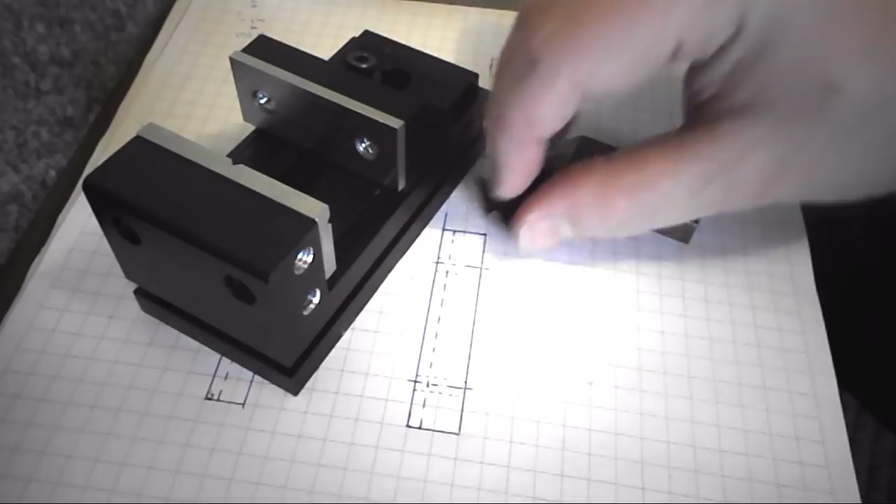I primarily use this vise on my Sherline mill. It's a Sherline vise, and it actually works really well. It's a screwless vise with an aluminum body, however it does hold pretty steady.

But clamping the vise to the table is the major issue I end up dealing with. Something I added recently was some holes to the side to put stops, and I'd also like to make some jaws. These jaws here are removable, held by 2 screws.

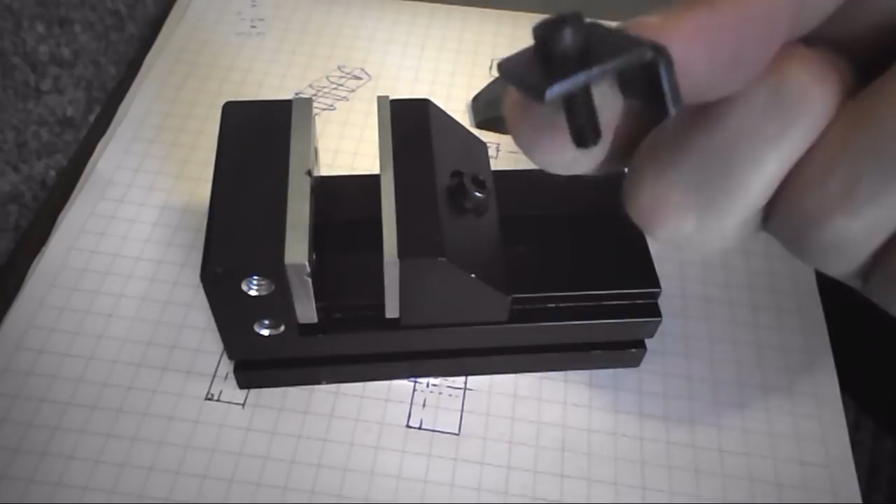Some jaws, maybe step jaws, some things like that. This is what you can buy from Sherline as a hold down, and it works, but I just want something a little more substantial.

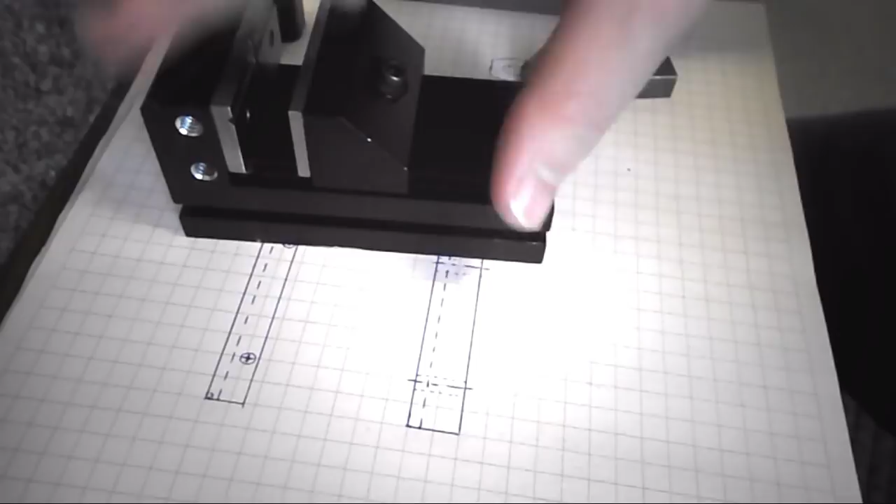So I came up with this, which is a piece that would span the entire length of the table, 2.5 inches, and have 2 locations to bolt into the 2 T-slots, and they would be rails that would catch on this side rail.

And I came across a whole bunch of this A2 stock. It's oversized, 3/8 by half, so I'm going to use this to make the side rails.

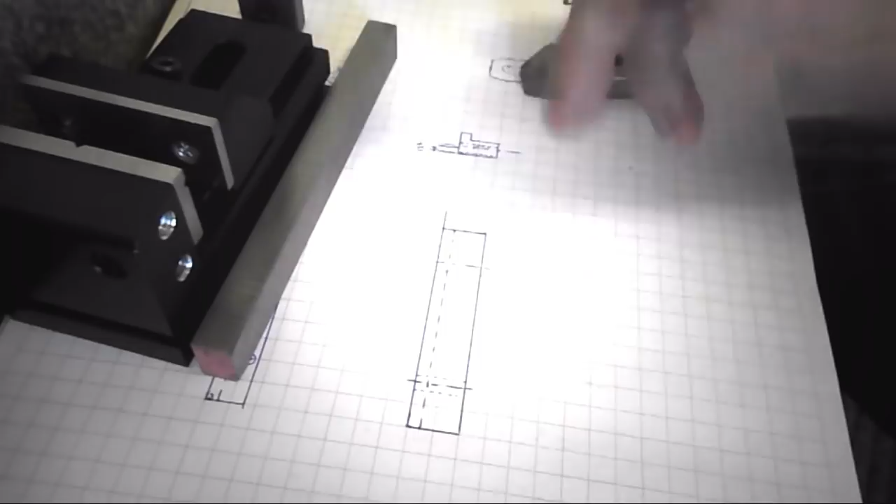Basically just square it up and put some holes in it, and then put a step in it like I show here, and that'll become my new clamping system. I think it'll work. It might be a little flimsy, but I'm gonna at least try it out. Overall I think it's a pretty good plan.

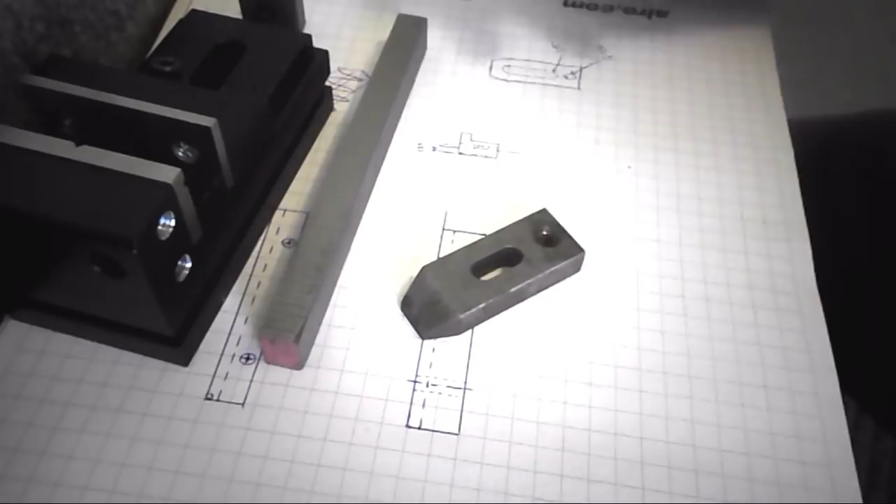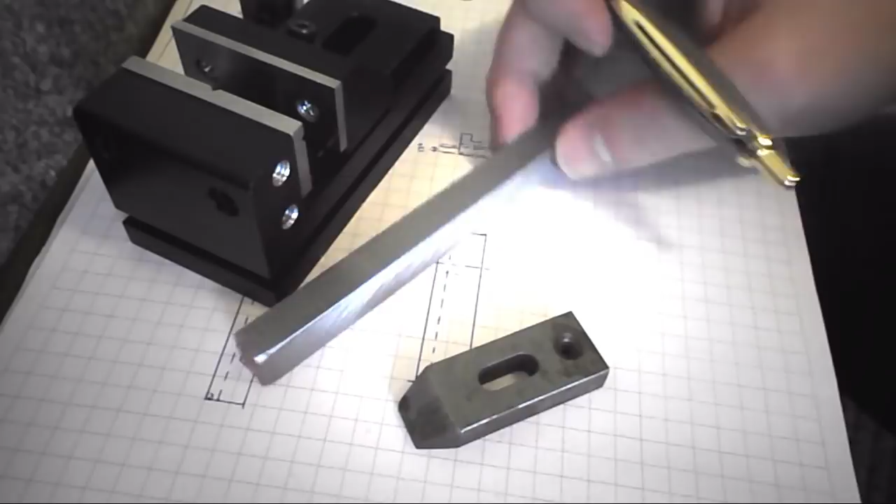Another thing I'm gonna do, since I have a lot of this material, is make some clamps like this, some hold down clamps. I have a few, but I'd like to have a whole set with different shapes on the ends, and some variety to expand my arsenal. So that's my side project until I get into my next major project. We can look at some of the machining and then hopefully some good results at the end.

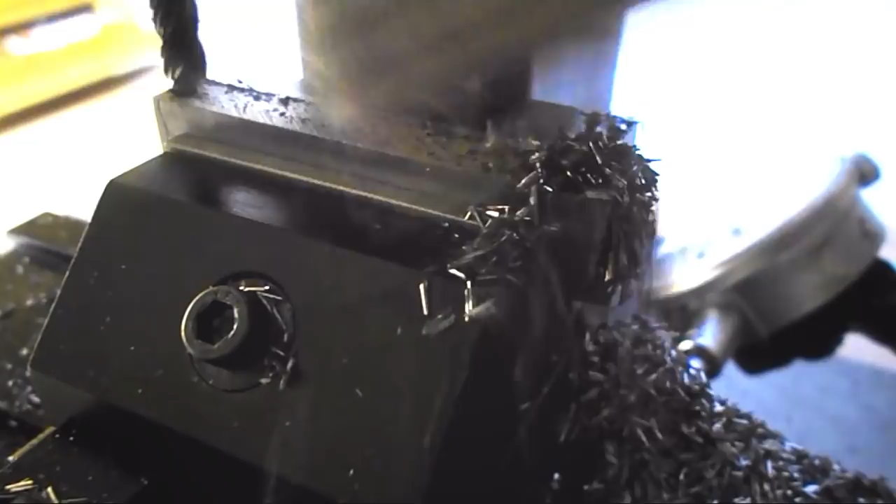So now the cut's done. It's sort of hard to see, but you can see the depth and width of that cut. That was a single cut. Now I've got to take one more cut, about 150 thousandths width, and then a finish pass.

So here I've got a stop set up, and I have the location in the Y all set. I'm just going to go against the stop here and drill some holes out, and these holes are going to be for 10-32 socket head screws.

Just sort of a dummy check the location. Looks pretty good. It's gonna have a fairly thin wall on the one side.

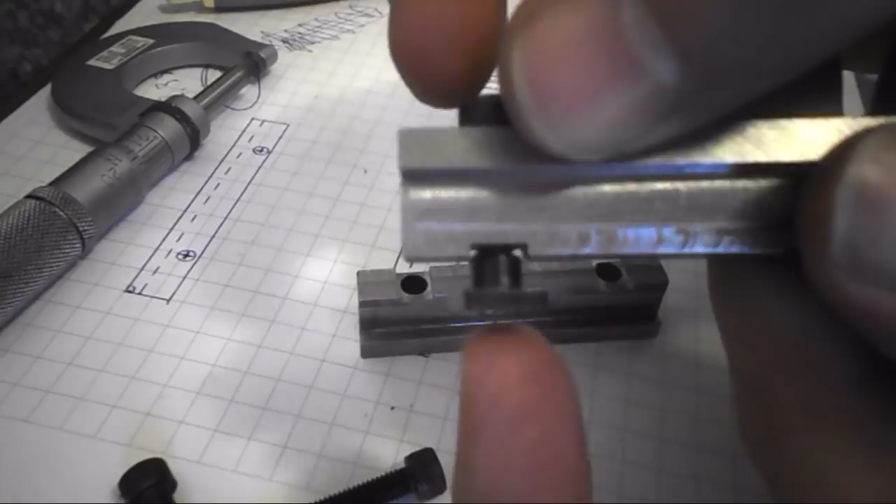Well, now I'm done with all the machining. You can see the slots that I put in, and in case it wasn't really understood what the slot was for, you can see how that's now allowed to go inside there. It just allows for a little clearance, so the bottom surface of the clamp doesn't come in contact with the top surface of the T-nut. And then this surface is actually the rail that's clamping onto the vise.

So unfortunately, I am able to at least check these to make sure that they clamp, but I don't have any more screws that are the right length. So I'm going to get some more screws, and also make some more T-nuts instead of purchasing them, because from the manufacturer they're pretty expensive, and I have the capability to make them.

And I don't really like that they're round, it's kind of hard to see that, but they're round at the top. I'd rather have them be just plain square, so I could machine a strip of T-nuts and then just saw them to various lengths. So I'll test it out on the machine and then call this project done.